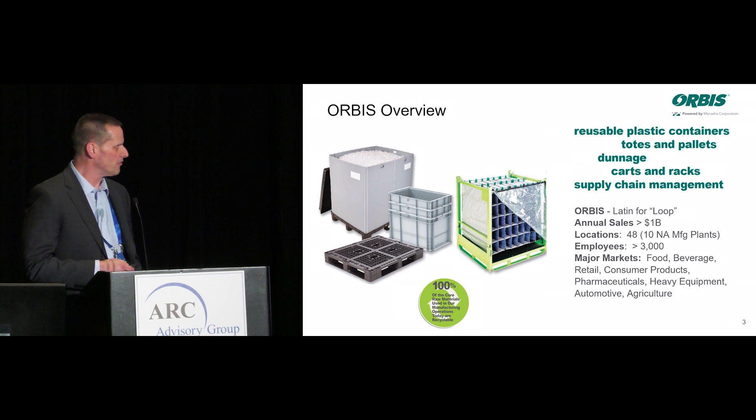ORBIS is about $1 billion in sales. We eclipsed that for the first time last year, so we were excited about that. Have roughly about 50 locations. This is a bit dated, but 10 manufacturing plants in North America. About 3,000 employees, and we service just a variety of market spaces. Just to blast through some of our key accounts, we break our business down into retail supply chain applications as well as industrial and automotive. So again, very much household names that you'll see on there.

We're known, again, for our innovation, so we're going to make different packaging systems. I'm not going to go through this detail in the essence of time, but these were a couple products that we came up with for the world of COVID. Everybody went into buy online, pick up at store, those types of things. We developed a lot of different picking systems for people like Walmart and Kroger and other grocery type of applications.

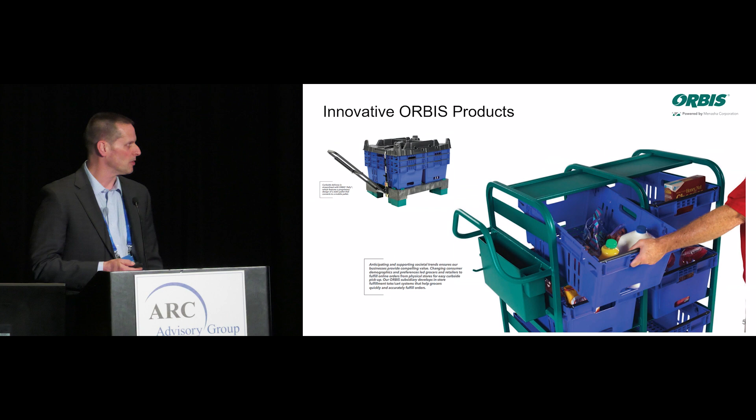As I mentioned, as we look at our view of sustainability, we're trying to do things not only to improve customers' ergonomics and how they handle stuff. They maybe don't have as much packaging waste in their environments, but we're also looking at how do we improve their carbon footprint, enabling them to talk about their sustainability initiatives.

This is an example where when they're sending a full load of product that's in the containers in the truck on the left, they get 84 containers on that truck. That might be going out from a tier 1 automotive supplier to an OEM. On the return loop, they can collapse those containers down and get basically a 3-to-1 ratio so that they're not having to pay as much truck transport to return it.

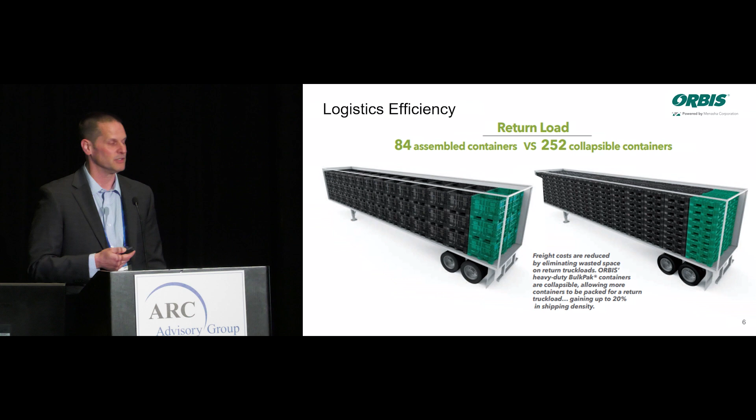So I know in the morning session, one of the people talked about the fact that a lot of times people can't drive their own sustainability, so they're looking to go upstream for it. We're one of those types of companies that they come to for help with their solutions. All right, enough about ORBIS. Not trying to sell ORBIS today. What I wanted to share with this group is some specific details of applications where we've used sensors and so forth to improve our operations.

Injection mold, we make a lot of plastic containers. I want to say last year we used about 400 million pounds of plastic. Roughly 40% of that is recycled content. Most of this is done on plastic injection molding machines. Very simplistic in nature on this drawing. Trust me, they're fairly complicated machines, but I'm going to keep it simple for you.

Plastic drops in on the left side at the hopper. They come in granules, typically in from rail cars or bulk trucks. It goes into an injection unit, which is basically going to melt that plastic. There's a screw and barrel. The screw augers the material forward, creates some friction to help melt it. Then there's some heater bands around the outside. So that's the injection unit, in a very simplistic model. On the other side of the center plate, where the nozzle is, is where the mold sits. And on that side, there's a clamping mechanism that opens and closes that mold.

It's a hydraulic-based system. Most of our tools are fairly large. Some of these machines are upwards of 3,000 tons of clamp force. They're moving molds that are over 80,000 pounds a piece. So you can imagine they're very robust hydraulic type of systems.

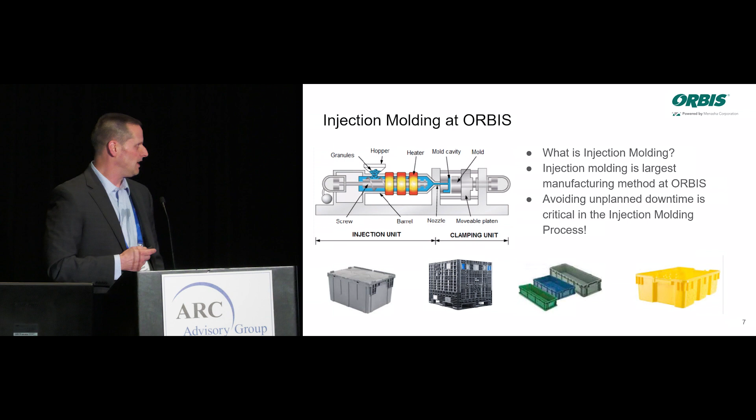We are a 24/7 type of operation, so downtime is critical to us. We do schedule our presses at about 90%, so it doesn't give us a lot of fluff. We're very much like the airlines. When we have a mistake, we stack up late orders for days. So our ability to recover is fairly limited, so that uptime is critical to us.

About 4 or 5 years ago, my team sat down. We were trying to figure out how do we drive our improvement for our uptime and reduce our unplanned downtime, obviously. And so we put together some goals: what would we want out of an IoT system? And we said, well, first and foremost, like everybody else, we want a predictive maintenance model instead of an interval-based model. We were very religious about interval, but we wanted to get to something that we felt was going to be more value added.

As part of that, some of you guys really like your charts. Again, I'm coming from an executive view on this. I'm an accountant by trade and dabble in engineering, but you're going to get the view of an executive here. I don't want to look at your charts. They're way too complicated. I want a dashboard that tells me that I need to check my oil. I don't want to have to try and know when to check my oil other than when it tells me that.

So we were looking for something very simplistic because we know not only those of us with a 5-minute attention span, but a lot of the people on the shop floor also don't have the understanding of all those charts. So we wanted something, a very simple dashboard, a check engine light, if you will.

Just like everybody else, we wanted to improve our uptime. We wanted to lower our procurement cost, reduce the amount of spares that we were carrying. And another one here is to reduce our troubleshooting cost. Too often we were sending people out to the floor. They were spending too much time doing diagnostics because they don't know why the machine's not running. Is it the hydraulics? Is it the controls? They don't know where to start, so they start with everything. We wanted to have something that at least could tell you the reason this thing is down is because of X. Go out there and look at that.

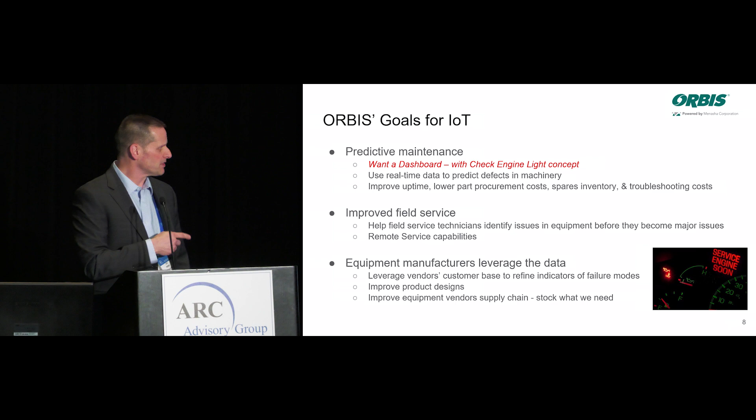Related to that, ultimately we wanted them to improve their product design, make a more robust machine, and at least in the interim, shore up your supply chain. In other words, if you're hearing from all of us customers that we're consistently seeing a pump failure, go back to your pump supplier and let them know that so that they can improve their systems, but in the meantime, go ahead and at least shore up your spare parts inventory so that when we call, we can get something the next day. So that was kind of our vision for what we were looking for out of our IoT approach.

We chose to work with our largest press supplier, a company called Milacron, another company that's been around forever and very well known. But Milacron was also not capable of doing this type of technology. We went to them and said this would create a competitive advantage. There was nobody in the world of injection molding doing IoT per se. So we gave them our vision, and they liked what we were talking about and thought it was a service they could sell.

So they partnered with a company called EI3, who really was the team that was able to put the data scientists behind it. We knew at the ORBIS level we weren't going to hire a bunch of data scientists, and Milacron knew they weren't going to either, but we found the right partner to work with, and that's who they use today. The goal was really for their systems to tell us which part we should be ordering, and again, not just a whole bunch of charts, because we're going to drown in the data.

Just a little plug on EI3 - they're not the biggest name out there either, and it's somewhat because, I call it, they hide in the background and let these OEMs brand it. So companies like our sister company uses Bobst flatbed die cutters, and Bobst uses EI3, so they're branding it in the background as, oh, it's Bobst IoT or Milacron's IoT. They're leveraging other partners along the way.

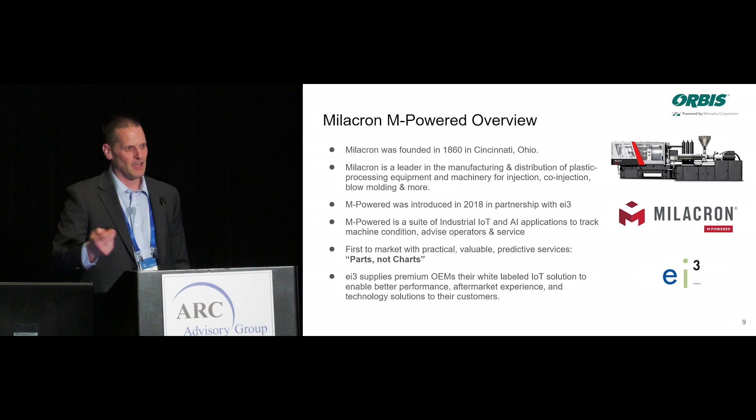So where are we at this point? ORBIS jumped in as a beta partner to Milacron and ei3 back in 2019. We have a facility that's only a little over an hour away from Milacron's manufacturing facility, which made it very convenient for them to bring resources out, load up sensors onto our machines, and we could figure out what sensors were actually going to tell us what we needed to know.

We did go through the pain of having to deal with some failures and stuff to learn, but we got to a point where we started getting some pretty reliable information back from the system. Today we've got 22 of our 92 machines connected. There's 34 different things that we're actually monitoring on each of these machines, and there's 250 unique algorithms being calculated.

Again, for the 5-minute attention span people, we got our dashboard, our check engine light, and there's a little snippet on the right side. Each one of those green boxes or red boxes is a press, so we can look at that very quickly. The maintenance team can look at that and say that press is good for today, I don't have to go look at it.

We've put in things like, I've seen people talk about having to do the rounds - you got to go out and check the oil level on the sight glasses and check that the pressure valves are at the right points. We don't do that, all that stuff's captured. If it's in the green zone, you see a green box. If it's in a red zone, it doesn't mean the machine's down, it just means there's something you should go take a look at, and we can drill into that.

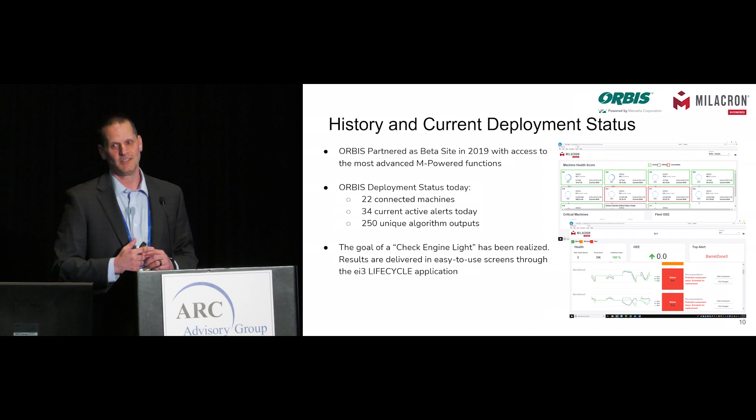So an example is in the bottom - one of the machines that day was showing that it had 3 of the heater bands that were bad. It didn't mean those heater bands had fully failed yet, but it meant it's something to go take a look at before they start to fail. They're showing signs of it, and I'll go through that here in a second.

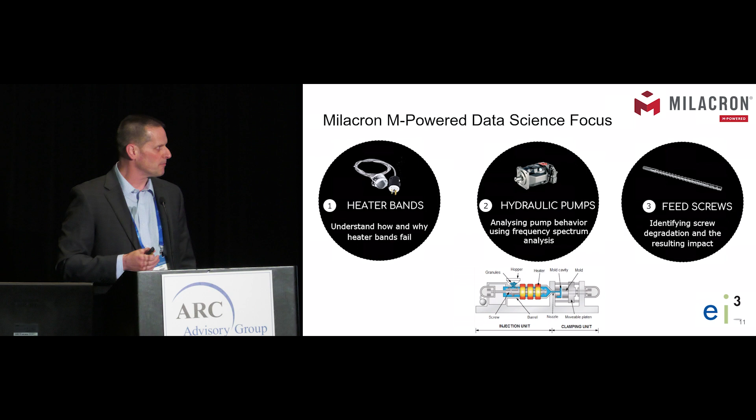So today we really challenged this - we did a Pareto analysis. We were actually very data oriented, had a lot of history, and we were able to say, okay, these are our top 3 or 4 items that were causing our downtime. It was heater bands, hydraulic pumps, and then the feed screws on the machine. So we started off with heater bands, and I would have said the team within maybe 2 to 3 months came back to us and said, here's an algorithm that's going to tell you whether that heater band is on its way to failing or not.

And so they gave us the fancy little charts, and to be honest with you, I don't really care what's happening in the background - again, 5-minute attention span. I look at it and go, well, okay, the data scientists told us. On the bottom one as an example, when the green line and the orange line start to separate, that heater band is starting to draw amperage at a different level than normal.

It's on its way to failure, but it hasn't failed yet. It would flatline if that happened. Our maintenance team could go look at that if they wanted to, but I'll tell you, most of them just look at it now and trust the data. On the previous screen it says heater band 3 is going bad, so they just go replace heater band 3. They don't even come in and look at the data anymore. We've gotten to that level of maturity, I guess.

Nice part about this, on these 22 machines only, the first year we saw over 7,000 hours of unplanned downtime go away. Because we could then schedule a heater band replacement while we were doing a mold change, and now we're not incurring the extra downtime. So it was a huge win for us.

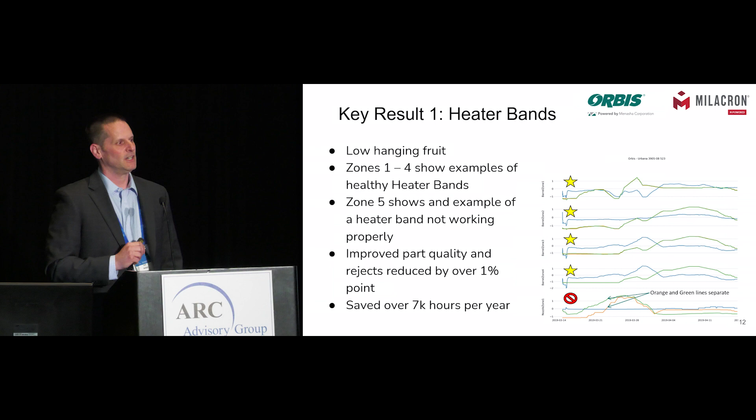We also started to see part quality improve. Typically in our world, 3-4% scrap rates are pretty normal, and we saw a 1% drop in that. That's because when a heater band goes out, the material isn't at the right melt temperature. You start getting short shots, or what we call unmelt, meaning the plastic didn't melt all the way, and so you get defects. We've been able to reduce that by 1%, which was again a nice bonus for us.

The next one we took on was pump health. Again, the hydraulic pumps are the next biggest pain point we'd have. When a pump goes bad, it tends to disintegrate. It throws what we call glitter into the oil, so the brass starts to come undone, and it tears up your machinery as a result.

So the EI3 team at Milacron developed what they call their Symphony vibration sensor. It's also a sound-based sensor. We could start to track — you can see in the upper left-hand corner where that particular mold running was typically on the lower end of that range, and all of a sudden we started to see a ramp up. So we took that pump offline where the red line crosses and proactively replaced it. We sent it out, had the pump torn apart, took a look, and on the inside it was all galled up and about ready to fall apart.

So it was a good validation for us. We had another one, the second one, same thing. So we were able to use that technology to create predictions on this. What's really clear is the time horizon — we can tell about 2 months before that pump's gonna go bad. That gives us plenty of time to get spare parts in. I'll be honest, we carry these pumps in our stock anyway, but now we don't have to carry as many because we know we can take that one, have one backfilled and on hand before we ever need to do that swap.

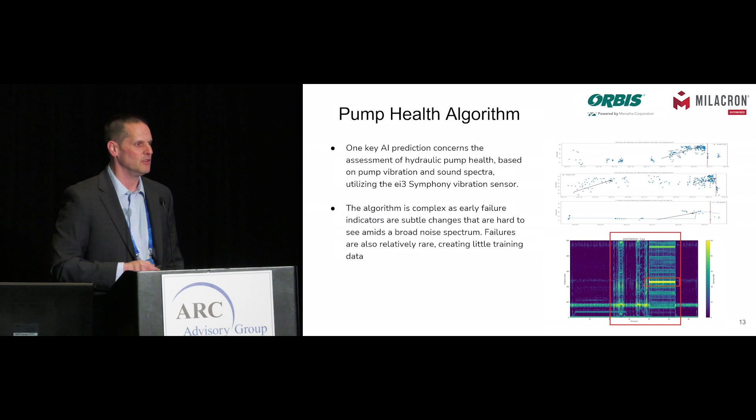So that's worked out extremely well for us. I will give the data science team credit — again, I'm not going to try to understand it, but I will give them credit.

I'm going to use the top example where there's some orange and blue dots. Part of that is noise. That's the same chart I showed you from the previous page, only shown with 2 products running on that machine — in other words, we have 2 different molds that we run on that product. The orange one we typically run on the high end of the range, and it didn't look like anything was unusual if you'd only looked at your data based on that tool. But the other product wasn't maybe taxing the machine as much, yet over time you could see that if I took the orange away, you'd see that ramp up. We would have never seen that if we were only analyzing the orange one.

So my point is there's a lot of data they've got to try and a lot of noise they've got to ferret through to decide: is this really something that's going to create a false positive, or is it something that's real? So I give them props for that sort of thing.

The pumps, for us, don't show like it's a huge savings — it shows roughly 48 hours, about a day and a half to 2 days to transition that. But the reality is if we don't do it, the glitter oil starts tearing up the valves, tearing up the seal kits in the machine, and we have all kinds of problems. So it becomes a multi-month series of issues if we don't take care of it.

It's not perfect yet — I'd say we're batting about 750, which for those of you that are baseball players would understand that analogy. That's pretty damn good.